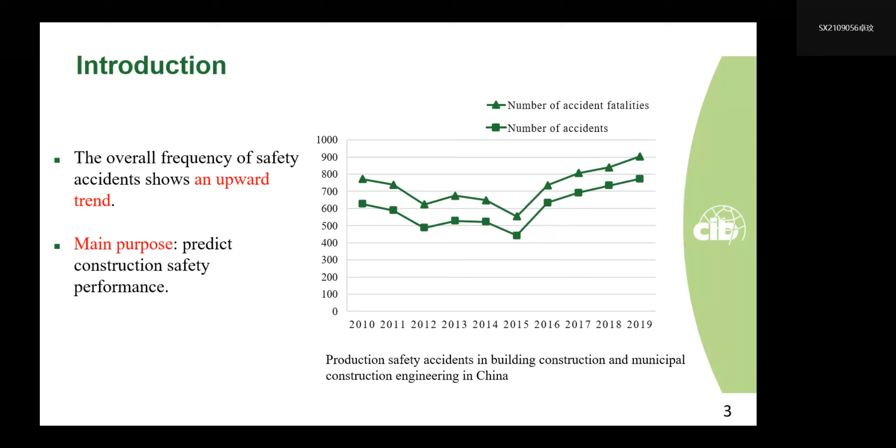Not only in China, casualties from construction accidents have been a problem that has plagued the world. So, it's urgent to predict construction safety performance. This is also the main purpose of our study. It can be found that researchers are trying to combine multiple methods to improve the accuracy of construction safety predictions. This is a valid direction for research.

However, many researchers have not focused on safety performance as a complex variable affected by multiple factors. Prediction accuracy can be improved by analyzing the variable and its influencing factors together. Meanwhile, the time series has a principle of near is greater and far is less. That is, the future trend of time series data depends more on the past data close to it.

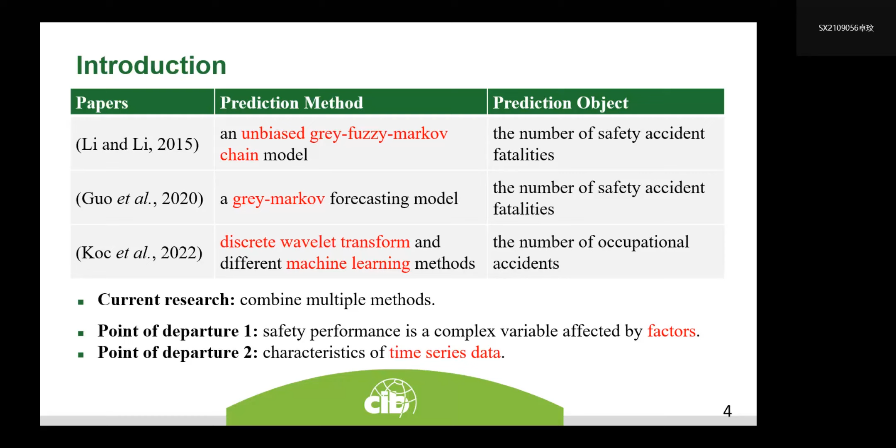Considering the 2 points of departure, this study used influencing factors to predict safety performance and took into account the relative importance of time series data for each year. The main process of this study is carried out according to the figure. Firstly, the indicator and its influencing factors were identified by the literature review. Secondly, the analytic hierarchy process, grey relational analysis, and the GM(1,N) model were used to construct the prediction model. Then, the collected data was applied to the model. Finally, conclusions were drawn.

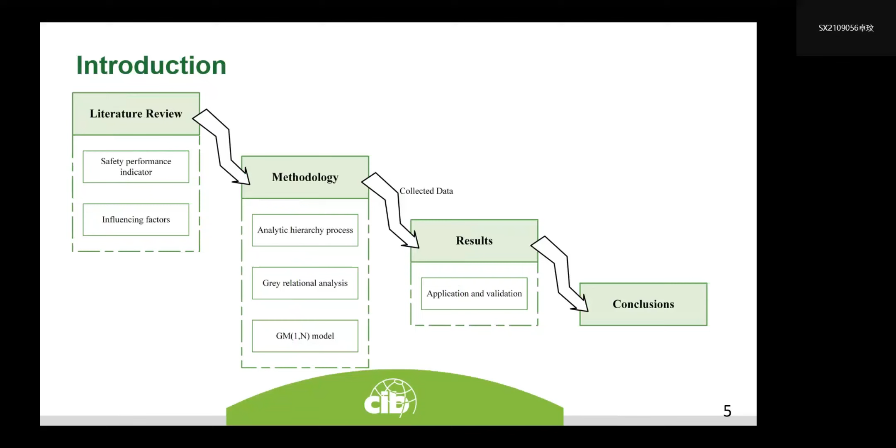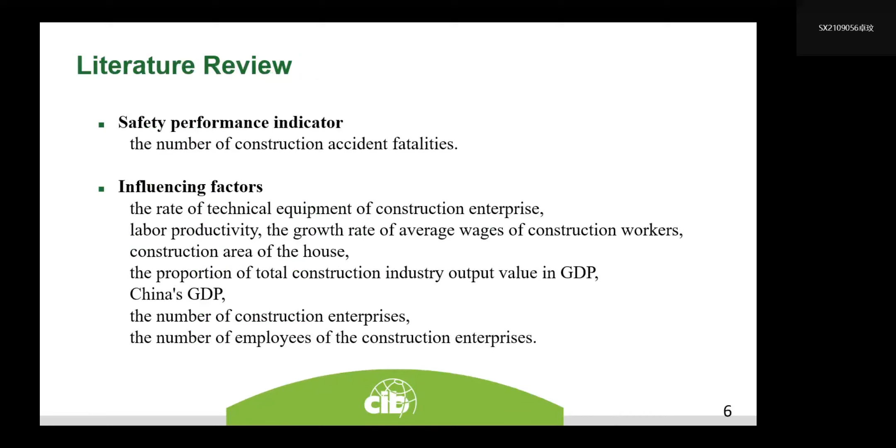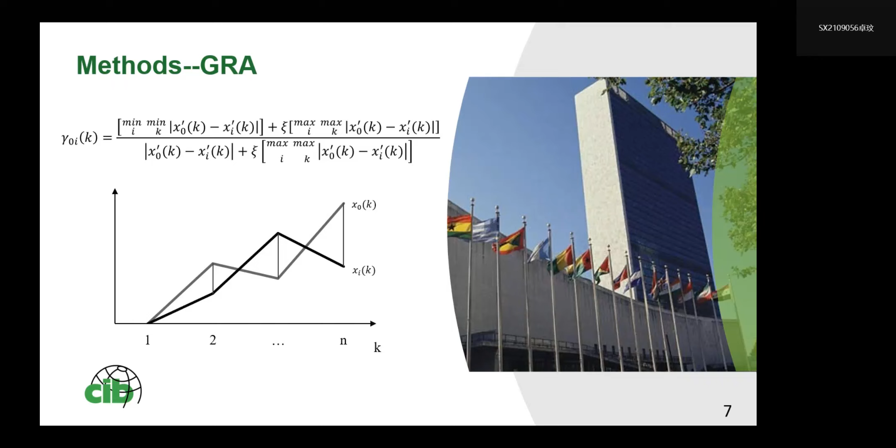Research on construction safety varies in different national contexts. Therefore, the literature collection of indicators and factors was mainly in China. It's more suitable for the Chinese construction industry. Grey relational analysis measures the degree of association between factors based on the similarity of trends. In this study, GRA was used to calculate the grey relational degree between the influencing factors and the indicator to select the final factors for prediction.

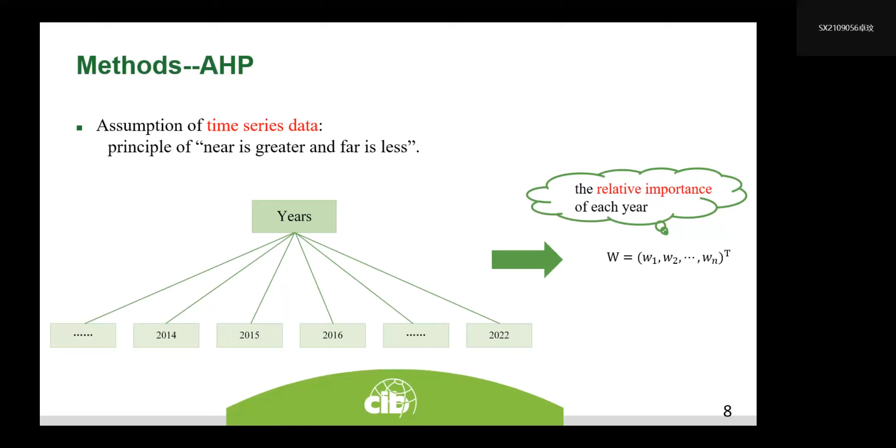The analytic hierarchy process is a method for analyzing decisions by factoring in weight. Since the time series has the above-mentioned principle, in this study, AHP was used to calculate the relative importance of each year. It's worth noting that in grey relational analysis, the weights of all years are the same, which is not in line with the principle of time series. So, this study used AHP to optimize the grey relational degree.

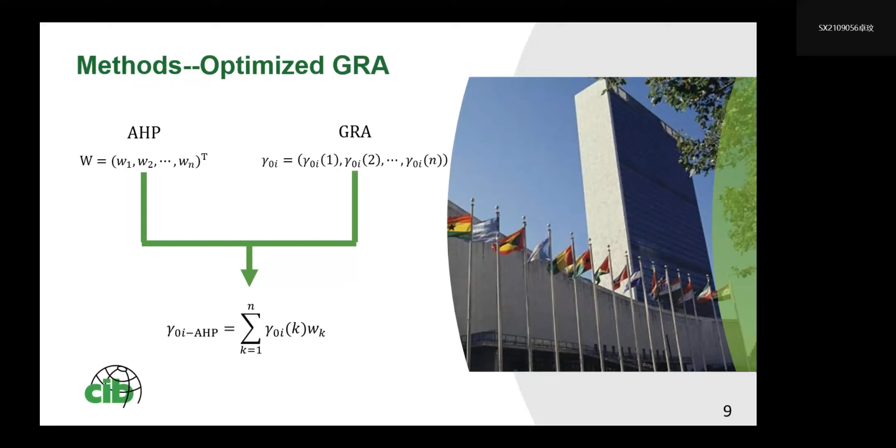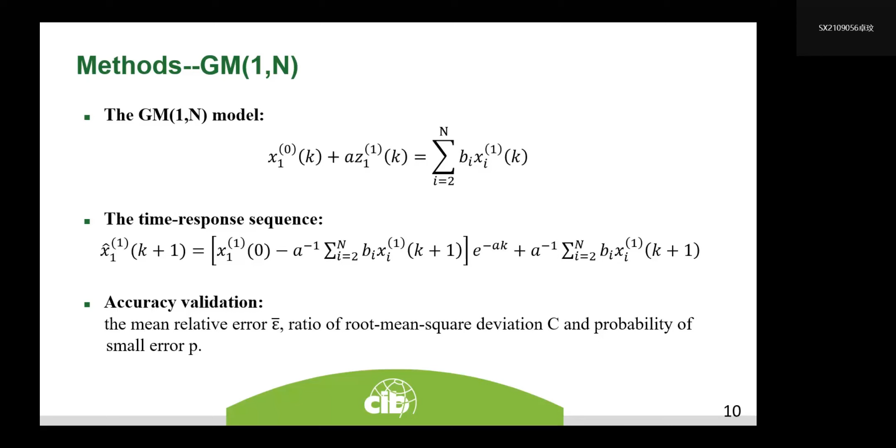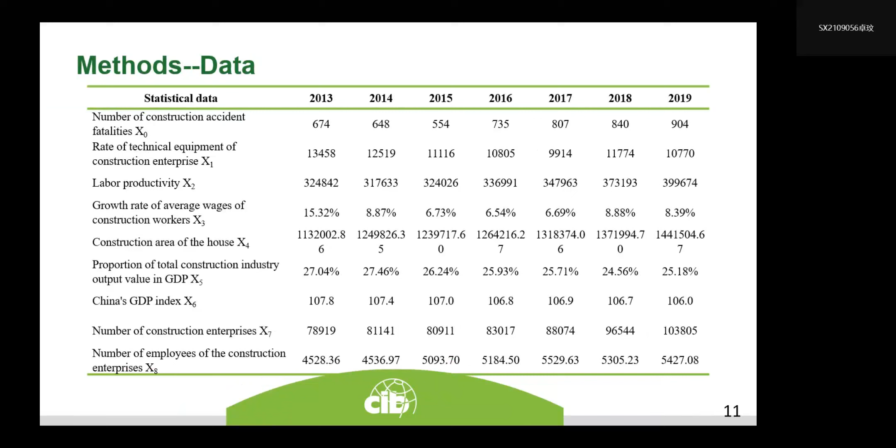Grey prediction theory transforms the original sequences into regular sequences and then predicts future data. As one of the grey models, the GM(1,N) model is composed of the system characteristic sequence and the factor sequences. It's more effective for the prediction of complex systems. So, in this study, the GM(1,N) model was used to predict construction safety performance. Statistics were obtained from information publicly released by the Chinese government. Due to the division of responsibility mentioned previously, this study selected data from 2013 to 2019 for the application of the model.

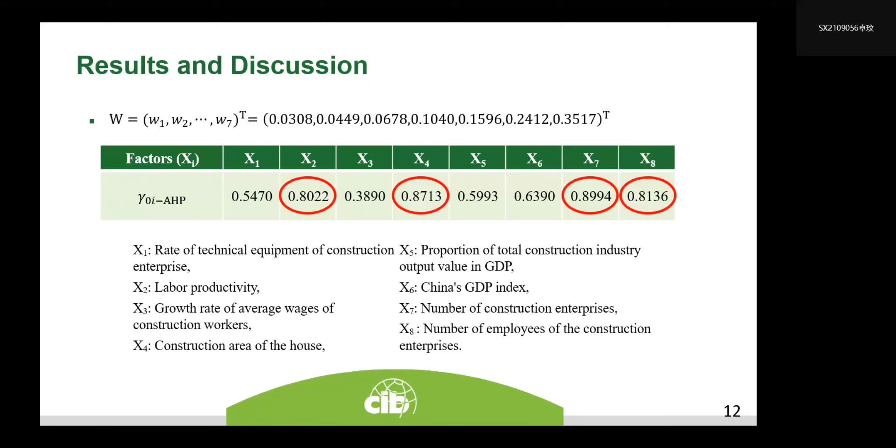Now we move to the part of the application. After the calculation of the relative importance and the optimized grey relational degree, it can be seen that there are 4 factors with grey relational degrees greater than 0.8. So, these 4 factors were selected as the factor sequences for prediction.

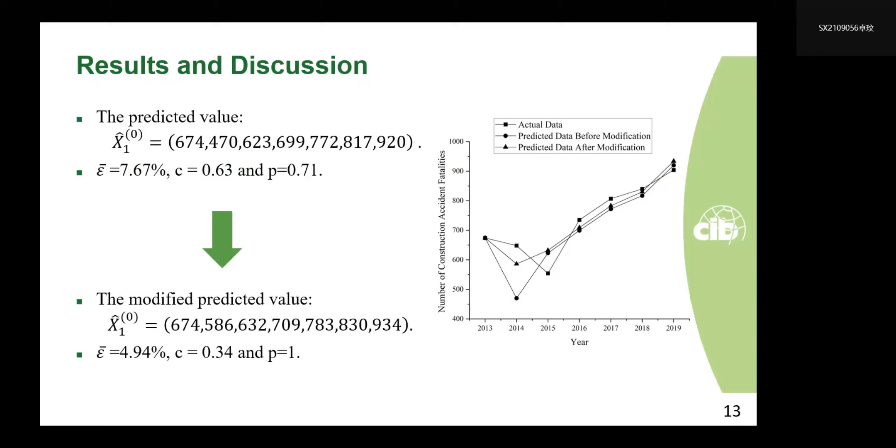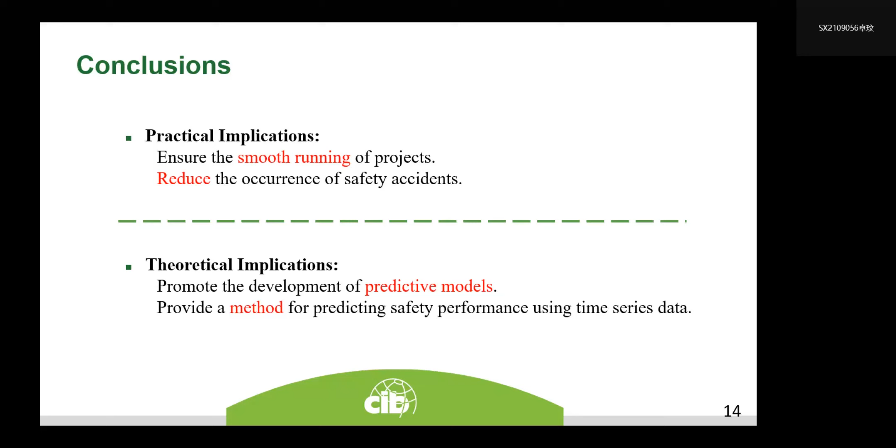This study helps to plan the necessary actions and measures to ensure the smooth running of projects. By controlling the influencing factors that are strongly related to safety performance, the occurrence of safety accidents can be reduced. At the same time, the constructed model promotes the development of predictive models. It also provides a method for predicting construction safety performance using time series data.

However, there are still some limitations. The grey model has the characteristics of small samples. It's difficult to predict large samples in a long time range. Therefore, improving the prediction effect of the model requires further research in conjunction with the characteristics of the construction industry, rather than increasing the prediction years of the data.

At the same time, it can be found that this prediction model can only predict the number of accident fatalities for the year based on the influencing factors. In the future, we will predict the future influencing factors and then predict the safety performance based on the factors.